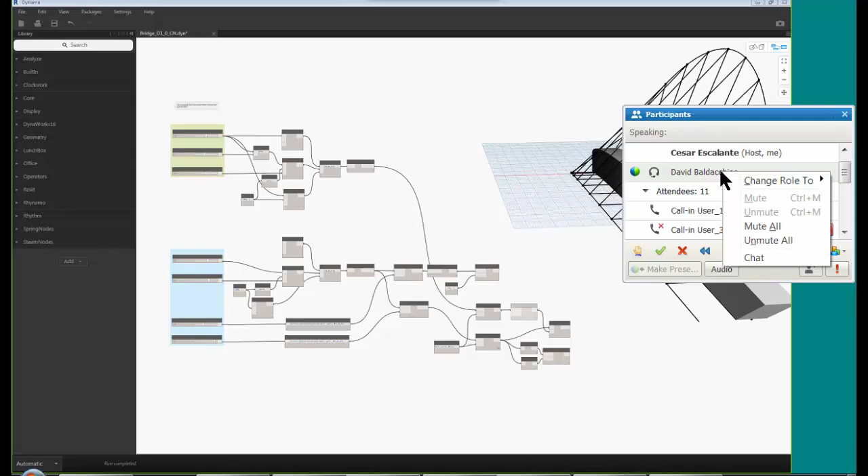David, I'm not sure we hear you. What is it? Hey, David, if you hear me, we don't have your audio. Can you hear me? Now we can. All right, I don't understand why this headset does this sometimes.

Sorry. So this segment will just go through a very short presentation on how to use the DoesIntersect node, and essentially takes an example that I had followed a while back from Zach Kron, and sort of builds collision detection, so to speak.

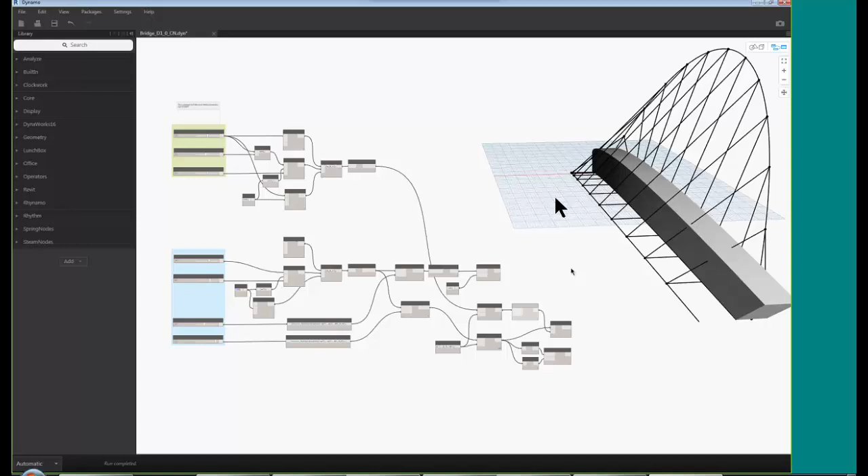So I actually took the nodes, and I'll expand them in just a second. I took the nodes and put them all into a custom node. So I'm going to go ahead and put that in here. We'll also go quickly through the process of putting this in a custom node. So I can pass the geometry, I can pass the...

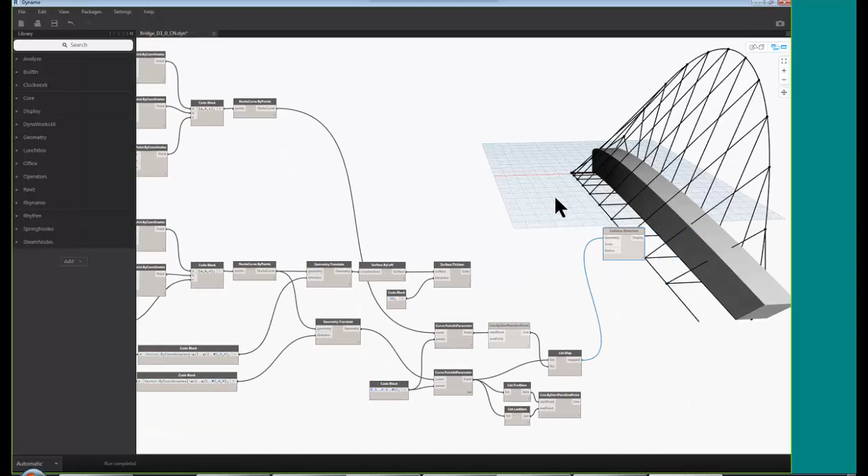Do you still hear me? Yeah, that was weird. Fault, sorry. Okay, that's okay.

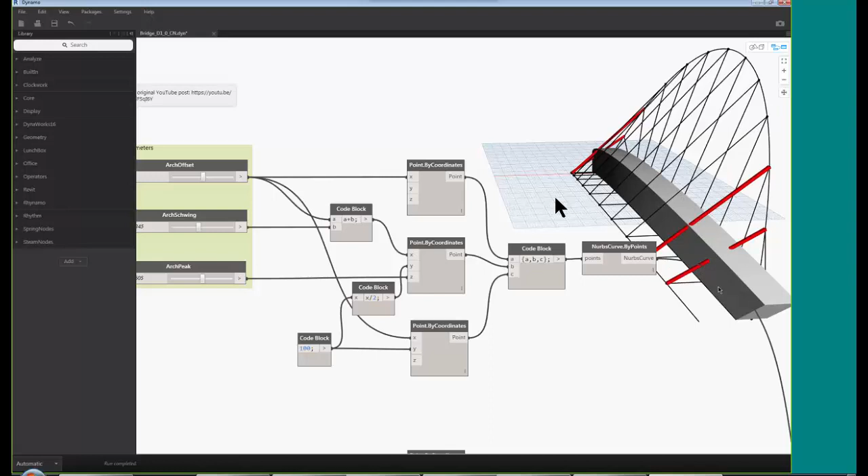Any time we change the geometry of this bridge—if you haven't followed this example by Zach, it was about an hour long if I recall, the YouTube video is up here—I basically followed him and built this bridge. During the presentation, Zach said it would be nice if you could do something more automated to find where your supports don't comply with certain clearance requirements. So that's what I ended up doing here.

As you can see, if I change the geometry of the bridge, you can see where those supports turn red, or they disappear. We're going to walk through the process of building this custom node, or set of nodes, that allows you to do this. I'm running version 1.0, and they actually fixed one of the problems I had come across in the past with refreshing, so that's very nice to see.

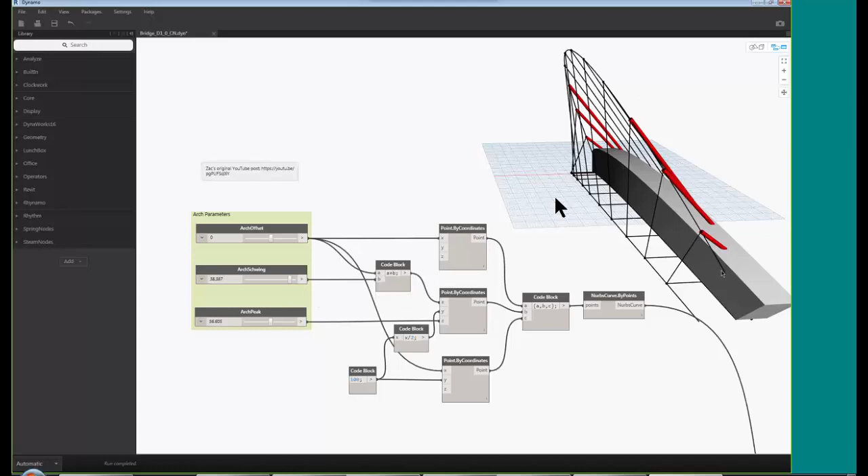We're going to just go through what this node actually does. So I'm going to go ahead and remove it, and I'll start by placing the geometry DoesIntersect node. This is central to what's going to happen here.

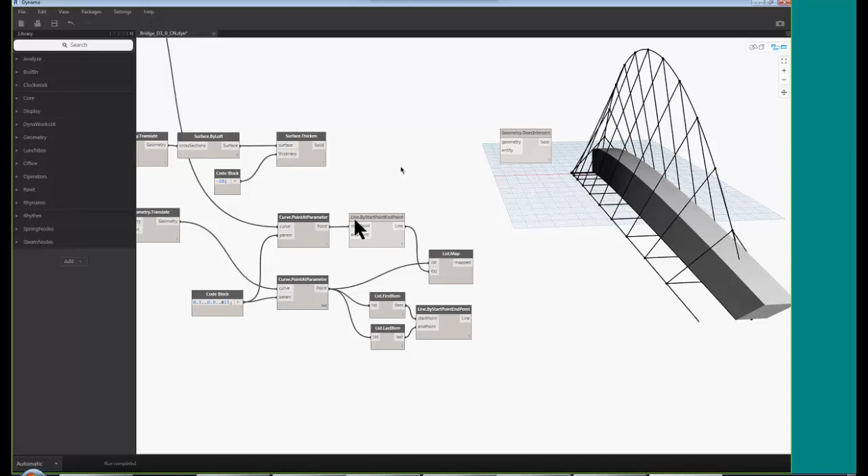I'm going to take all the elements that I want to test and collide them with this form right here. In this case, it's just a surface that's thickened by 10 feet. As you can see, if I change the value, the form gets thicker. So this is basically a clearance mass or solid, and it can also be turned off so it's less distracting.

So we pass the geometry here, and we're going to pass all the lines that we want to collide. In this case, I'm just doing the slanted supports—I'm not doing the curve, which we can do as well, but for simplicity I'll leave this as is right now. So I'm going to take these lines and pass the geometry, and then the entity that I'm going to collide is this solid that we just hid. I'll pass it to that, and I get a list of true or false.

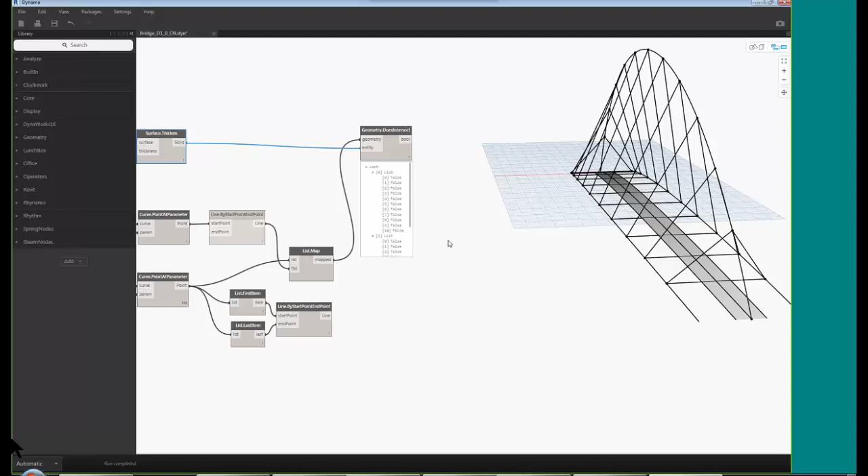So what I'm going to do is use these results. Obviously everything is false right now because nothing's colliding. If I change this—let's make it steep like this—you'll see that we have a few true values, which means that some of these are colliding.

And if we click on this node—actually not this node—we have to filter our list with the results of this list. So the next thing we're going to use is the filter by Boolean mask, which is one of the most popular nodes, at least that's how I find it to be very useful.

So I'm going to take the list and pass this as a mask. However, in this version, once you do this, later on we're going to have to flatten it, because I found there was a slight difference between version 0.9 and 1.0. So you always have to be careful and test out your definitions from version to version, because minor changes might cause a prior definition to fail.

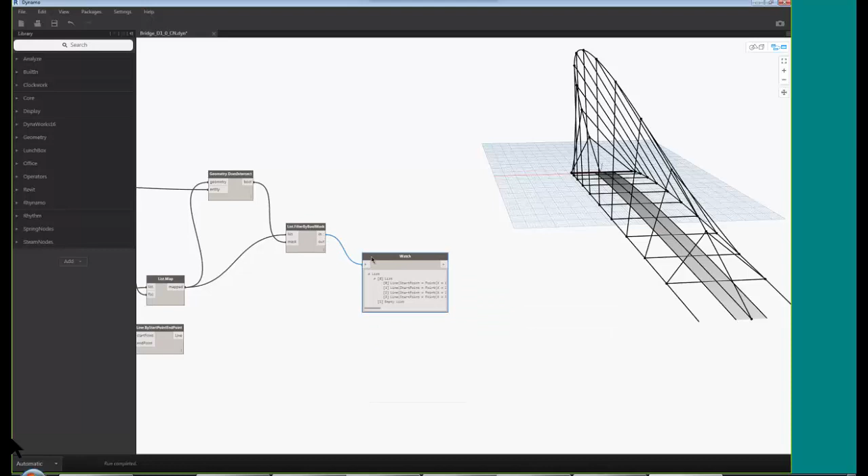So now we have a list of lines that's being filtered, right? If we inspect that using the watch node, we'll see it's outputting a list of 4 lines, and that list, if I click on each one, you'll notice the labels here—so you can actually inspect and see which lines are colliding. There's also an empty list in here.

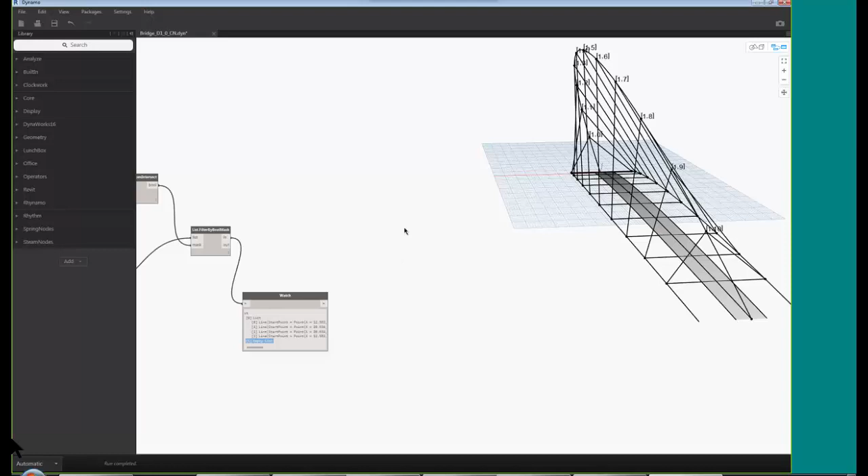So next, to highlight this, we could place a node to color these lines. The problem is you then have to go through this definition and start hiding lines, because the colored lines sometimes get encapsulated by other copies of these lines, and you won't be able to see the results. So instead, I decided to do a poly surface by sweep.

So I'm going to do poly surface by sweep, using a rail and a profile. For the rail, we're going to use this set of lines, and this is where I saw a difference between 0.9 and 1 — we need to also flatten this list. So instead of just getting a list nested inside another list with an empty list, we flatten this, and you'll see it's now just a list with 4 items in it. So we pass that as the rail.

Now we need a profile. For simplicity, I decided to use just a circle, so I'm going to use the circle by plane and a radius.

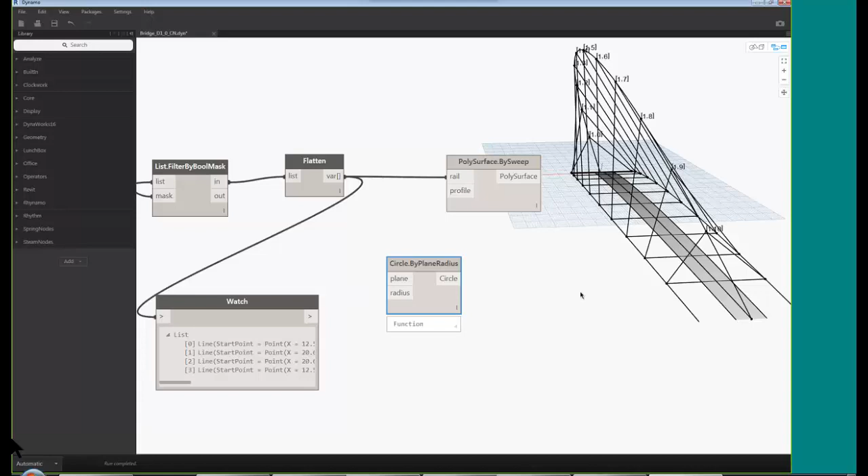Notice here that the radius also has a default. Nodes, as you might know, have an input with a default value. In this case, the value is 1, and since I'm working in feet, that means 1 foot. So I can even leave it out without giving it an input, and it's going to assume it's 1. I can pass that as my profile.

There's an error right now because I still have to remove this node here and define the plane. Since I have the lines here that are being filtered and passed through the flatten node, I need to just create a plane at the parameter. I find this node pretty easy to use - it's curve.plane at parameter.

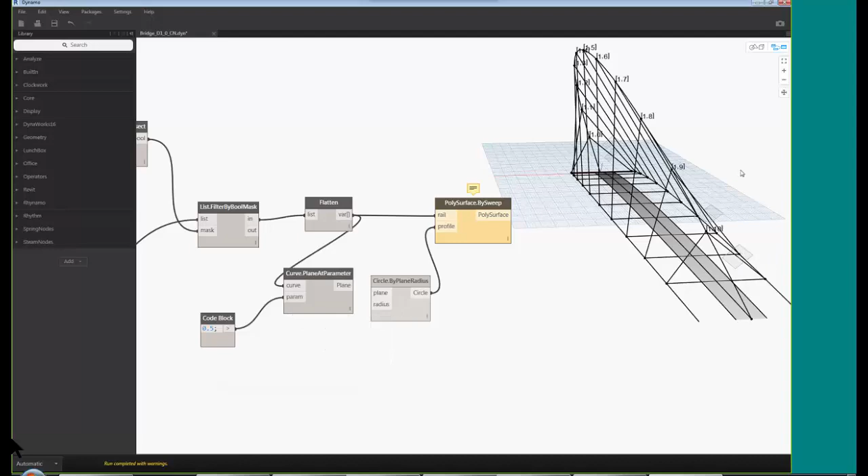It also has a default value of 0, so we don't actually need to do anything with it. I can take the series of lines, and notice over here we have some planes that appeared. Just so you can see what that means - if I give a 0.5 for the parameter, they go in the center of the line. I'll orbit a little bit so you can see them. Notice the planes right here on those lines.

I can also pass this as my plane, and there are the little circles I can use to sweep the poly surface. The other thing I found is that now this is failing because it doesn't know what to do with a list and a list. So if you adjust the lacing to longest, it understands that it needs to take the first item from this list, take the first item from this list, and create a poly surface, cycling through.

I'm not entirely sure why that is happening, because the lists are the same dimension - in this case there are 4 items and 4 items. So lacing set to shortest, if I understand it correctly, should still work, but it's not. I'm not exactly sure why - it has to be set to longest for it to work.

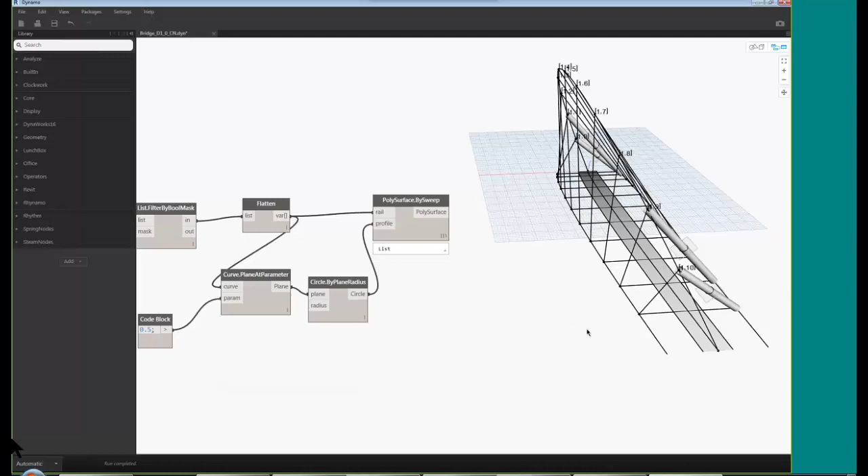So finally, to annotate this and make it a little more clear what's going on, let me readjust my screen here for a second. I decided to use the display by geometry color, so I'm taking the poly surface, passing it here, and then doing the color by RGB, ARGB.

Again, these have default values, as you can see. I decided to make it red, so I'm simply using a code block and putting the value 255. As you can see, it's colored red. Now, it's red here as well, but it's hidden because they're coplanar - the surfaces are coincident. So all you need to do is stop this from previewing, and then you can see this node essentially taking over.

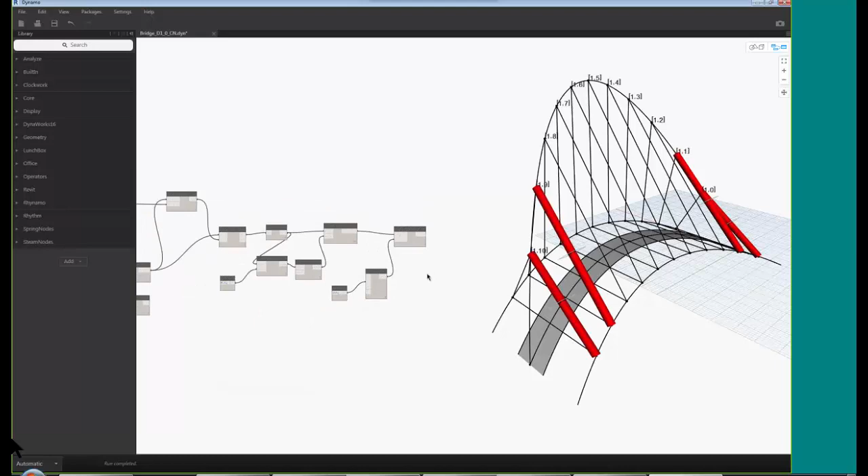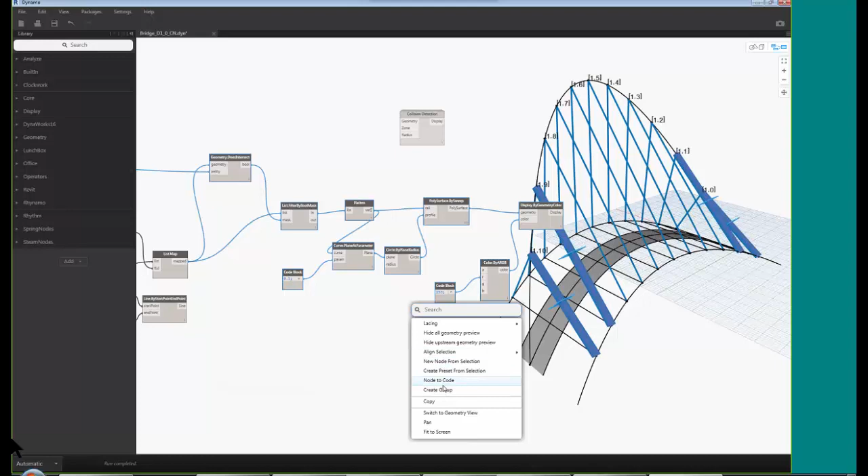That's pretty much it for what exists in this custom node collision that I'm calling collision detection. I simply took these nodes right here and said create custom node, new node from selection. It did a pretty good job at creating the node for me. I did make a few other changes to it, so if I go back to the node, I wanted to highlight a couple things that I did.

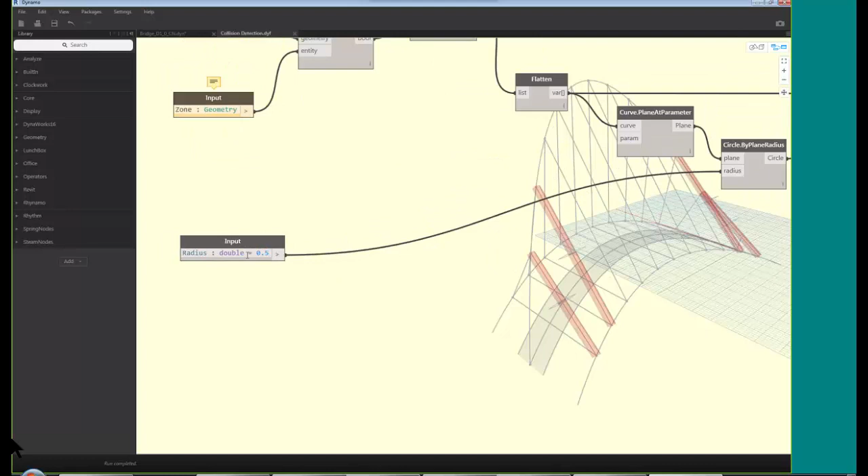I decided to add a default value for my radius - instead of leaving it 1, I wanted the default value to be 0.5. I was just experimenting and understanding how default values work in custom nodes. I renamed the nodes to whatever I wanted the labels to be, and there was another output I actually did not need and removed it - just a simple delete. I saved it, and you get the custom node so you can reuse it instead of having to do this whole thing every time.

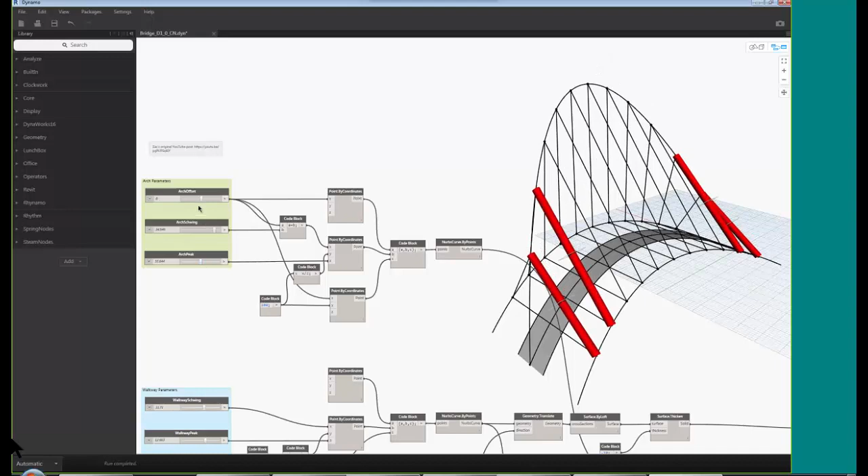The result is the same. The nice thing about it is that you can then play around with whatever you're trying to accomplish, whatever your structure is, and adjust and make sure that, for example, I can offset the arch here, and now I know that at this position I have the clearance I need for someone to pass over the bridge and not hit their head. There's a 10-foot clearance all the way across this pathway.

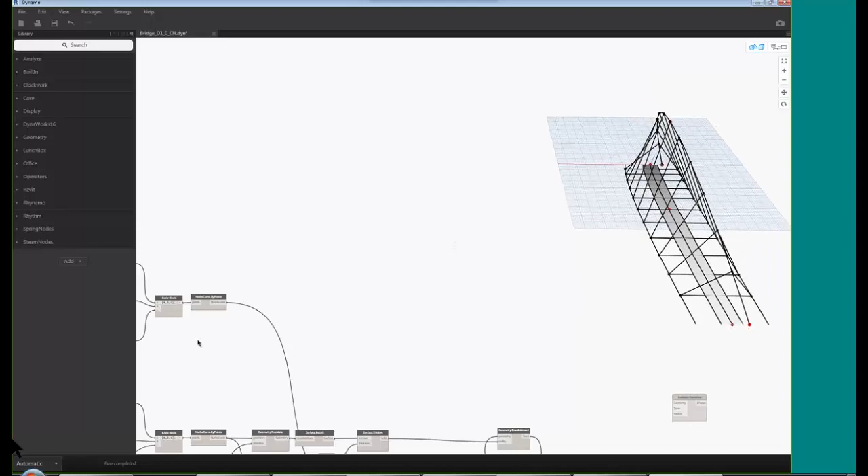So let's see - are there any questions so far?

The other thing I was going to mention is that, for example, right now I am only checking these slanted supports, whether they collide with that form or not. A couple things you can do is put more geometry in a list - so instead of just passing the list of lines, these lines right here, I can create a list, or take lists and join them and then flatten them.

And take, for example, this top support, take the individual slanted supports - as you can see, I get a list, so I have to flatten it again. Now I have a list of curves, and I pass that to the geometry. Oh sorry, I did something wrong here - let me see here.

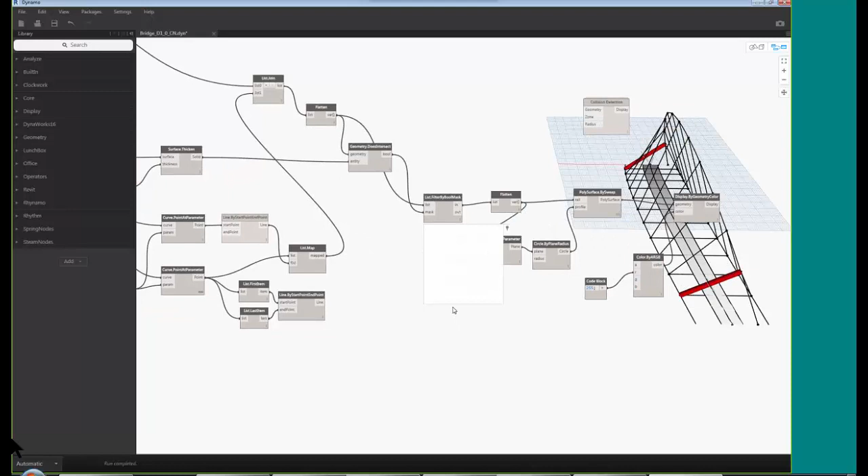There you go. So now it seems to be working as expected. Oh sorry, I'm going to close that out. Now it seems to be working as expected.

All right, I think that's it for the learning segment, unless there's a quick question I can help answer. Quick question, David: in this case, you extruded a circle as a way to visually indicate what's colliding.

Correct, yes. We could technically just change the color, right? And not extrude anything. Yes, you can change the color of the line. The problem is that when you have coplanar surfaces or lines on top of lines, you really don't have control over which line is going to be above and which one's going to be below.

So, for example, if I simply took this, as I was pursuing this, I was also curious to figure out a way to use the polysurface by sweep tool, for example. But that is what you're saying is correct.

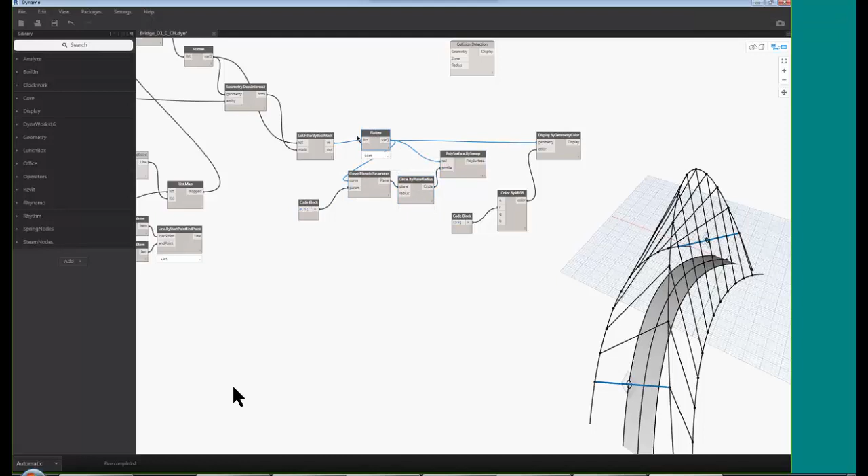What am I missing? I wonder if the color actually overrides lines and not just... I tried it, yeah, it does, because as I was playing around with that, let's see here, why isn't it?

Let me delete these. Weird, earlier I was able to change this to red as well. There you go. Somehow, I think there might be another copy of those lines. This kind of illustrates why I didn't want to use lines, because sometimes they sort of turn to black.

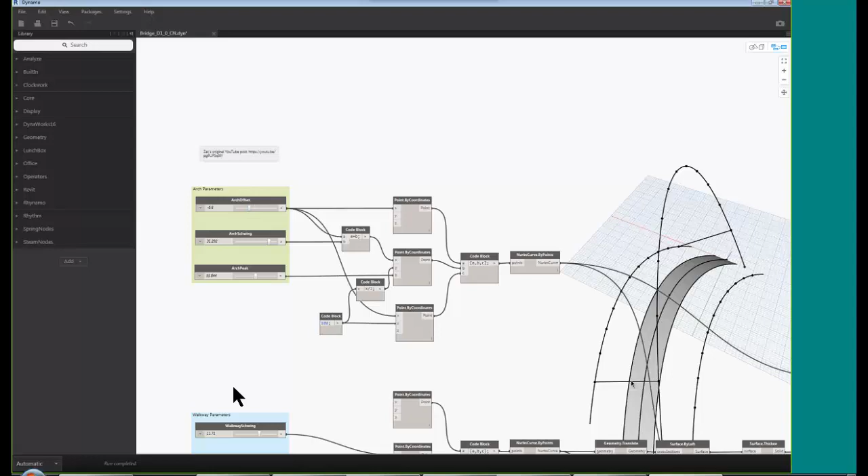See, it was still black. So you end up having to turn off a lot of preview geometry that I didn't want to do. So I thought that adding a sort of sacrificial surface that only shows up when there's a collision detected would be easier.

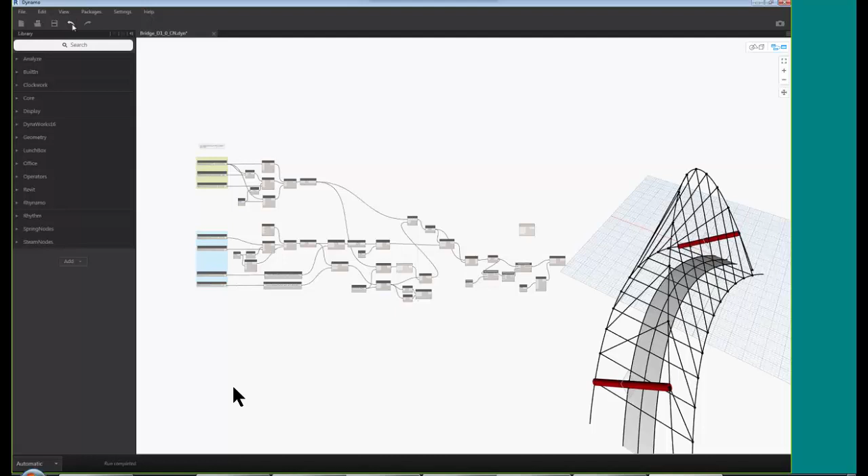So does that mean that there are multiple lines drawn on the same location at the end of the script? We just see all... sorry, what is the question? Does this mean that Dynamo draws multiple versions of the same line, one on top of the other, at the end of the script? And they just happen to be all black, so we can't see them.

The question was, if you pass the line into a new node that's using those lines, yes, it's going to be duplicated. Right now he was hiding some of the previews. That means that Dynamo draws those lines over and over for each node. I think that's what preview upstream does. Yeah, it replicates the geometry in every node.

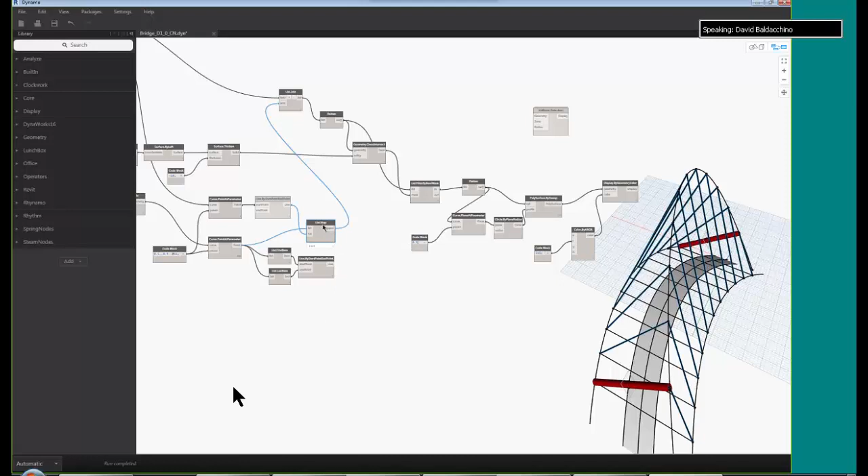This right here is utilized... yeah, seems not. Like for example, I've had a hard time also understanding how the preview upstream works, but my understanding is just like Cesar is saying: if you disable this, it means that anytime this list of lines is used, don't preview it anymore. So if you uncheck that, technically from here on out, that line only exists here, or if it's coming through somewhere else, I'm not sure. Let's see.

Well, it's still coming through, even though I said don't preview upstream here. This is what I was explaining - I have a hard time understanding what this preview upstream really does, because it feels like it doesn't work consistently. All right, we have a comment from Colin here. I was afraid to say that because I know he's online, but...

Preview upstream is only used with watch nodes. Wow, okay, so that means whether this is on or not, the geometry is still going to display. Okay, perfect. That explains why I wasn't understanding - my perception was that when you turn it off, you don't see it displayed anymore, but that's not how it behaves.

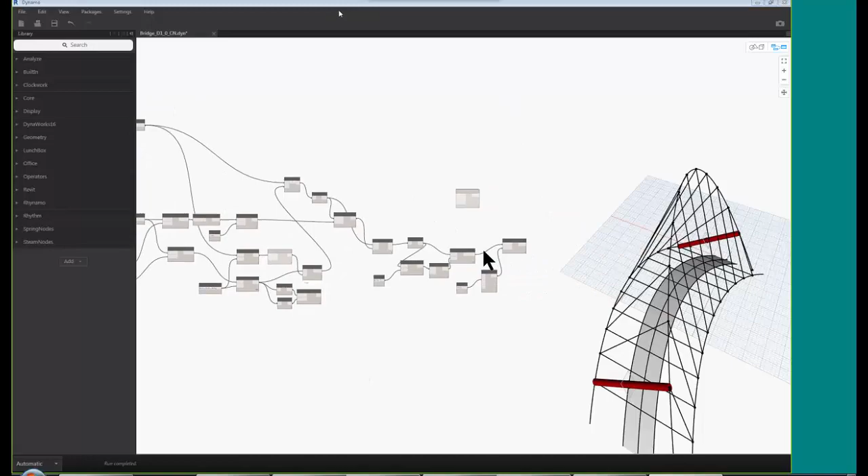Thanks, Colin. Any question for David? Good, David. So, if you don't mind, if people want to see this definition on our blog, could you email me the DYN file? Absolutely, yeah, that's fantastic, yes, I will. All right, thank you very much, David. You're welcome, thank you. And I will continue watching from home. Excellent, or recorded. Excellent, thank you.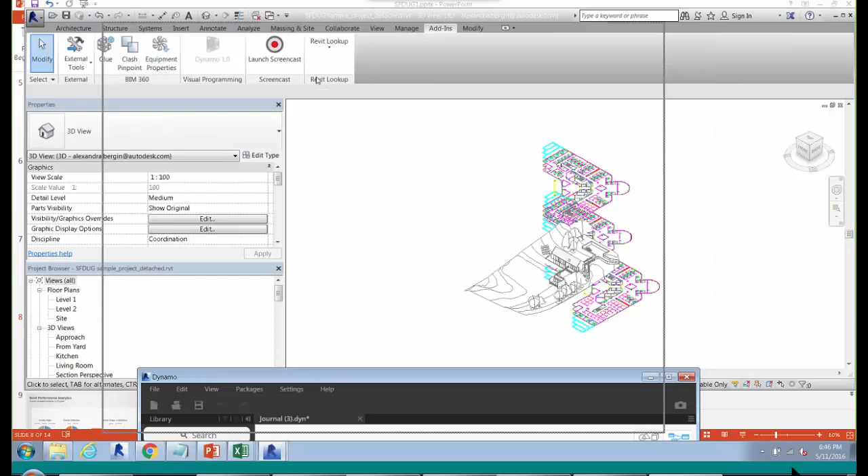Okay, let's make this big. Okay, so yeah, all of them are like this too. So we're gonna go slow and fast at the same time, just for digestibility, time, and my sanity.

First thing I'm going to do before we even dive in here, I want to show you what the output is, because that'll help you understand what the goal is.

And how I approach this, in working with Colin, is I came to Colin and said, I have these charts and this data and this source, and I know a little bit of Dynamo, and I've tried, and can you help me take it to that next level?

So I started with my end result, and I recommend if you are looking for specific information to extract out of your files, really start thinking about how you want it in Excel, because there's a whole part of developing these Dynamo graphs which is sorting the information to output to Excel. So you really want to understand what you need and how you're going to format it before you jump in here and spend a lot of time.

Okay, so what I've got here is two different tabs. One is called Journal Stats and one is called Add-ins. All right, so all we're doing is we're reading a journal file, right? And that is this guy here.

And this is like the extent of a journal file. And this is a short journal file, this isn't even like a long journal. This is like open the file, draw a line, and close the file. Now we know how to use Revit. Yeah, it's a lot. They can get really, really long.

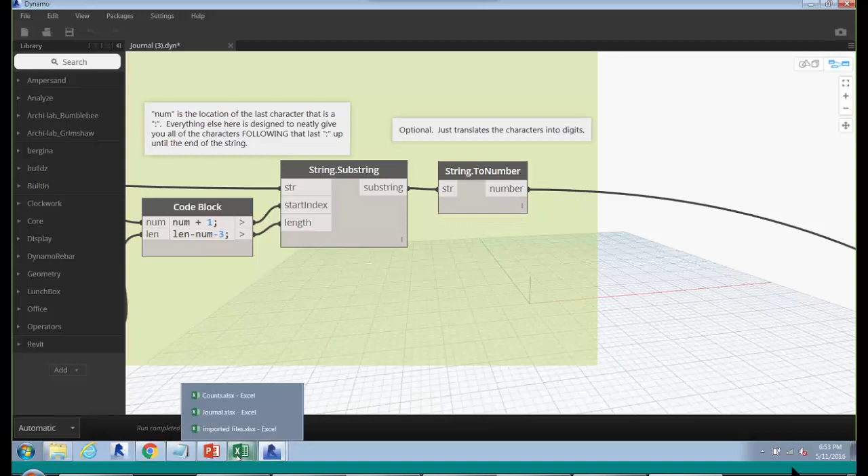If you look here, the first one—you see how this is represented all the way to the far right, and nothing else is. None of these are really considered numbers, but this one is. So Excel's treating this differently; it's a different data type than the other ones. This is the stuff that can really screw you up, because you're like, why aren't things melding right, or why aren't things calculating properly? And it can be just little stuff like that.

So this one is the exact same as above, literally the same theory, and as far as file size. One thing that's nice when you start parsing these journal files is once you've got your baseline graph, you can start copying, and then when things aren't working, that's when you have to start trying new things.

The video card and driver, for example, what do we do here? A couple different things had to happen, because if you look at the string, it's one string, but it has the card and the driver information, so we actually had to split it up. Whereas the other one we just took the one piece, found the little part of information we wanted, and pushed it out. In this one, we needed two pieces of information.

So you split it, and then we did a lot of trimming of white space to make sure everything was formatted right, and we were able to calculate those. How we're measuring is we've been calculating the number from the colons of values, so we want to make sure we don't have any empty spaces in there that we're misidentifying information.

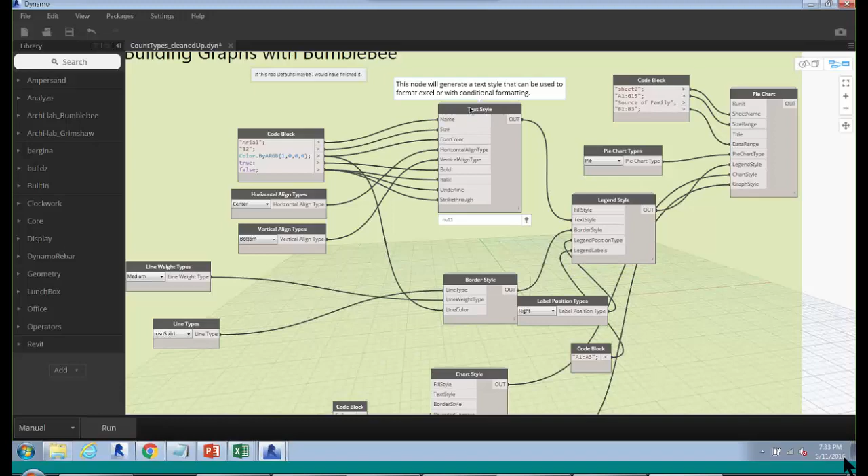The only other thing I have on here, which was a total side project that didn't end up happening, is I wanted to try to build all of the graphs using Bumblebee. I don't know if you guys are familiar with that. The issue is that this is to build a pie chart, this pie chart here. The problem is that there are no default values for any of the nodes in Bumblebee, so you have to laboriously code block out every single value. I just lost patience, honestly.

I was like, I just want to press the pie chart button in Excel, and I'm just going to do that. So you can kind of decide if you want to. I left it here just because if you were going to use this in a robust way in your firm, it might be worth your time to invest in building these things. For me, to show you guys, I did this for a little bit and was like, no more Bumblebee, no more. It's a package that enables you to build graphs with Excel.

Have you guys used it? Did you guys run into the same issue where just the default values killed you? Yeah, I have to spend more time undoing things than doing things. I think there's value there, but at the same time, it's just a lot of setup. Easier just to pass it back in with Flux and Grasshopper and use the plugins that are there. If you want to do that, you can just do it in Grasshopper. Yeah, no, it's true, it's a lot easier.

So that's content in a nutshell. Just to look at the final result again, we have this master count, and then we can break that up into different categories. If I had had more time in preparing for this, I would have done more. I have these other things that I just sort of quickly extracted from the master count list, but didn't have time to do the breakouts within the Dynamo graph.

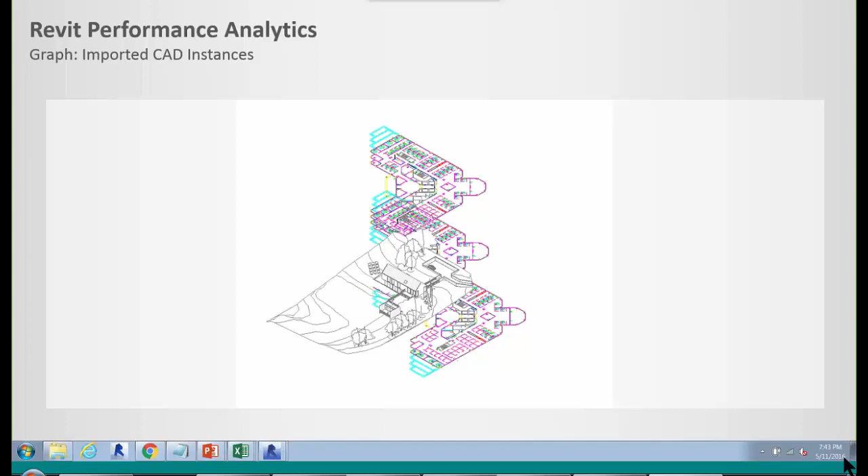So I'm just going to go ahead and open it. Okay, so like I said, look at a totally digestible and non-intimidating graph. Maybe I should have started with this one, huh?

So basically, like all the other ones, I'll show you the output first. There's a lot more I could do with this, but I ran out of time to show it all. All I wanted was to know the file name of every imported instance of a file. In this sample project, I've got 3 files here - 2 of them are imported and 1 is linked CAD.

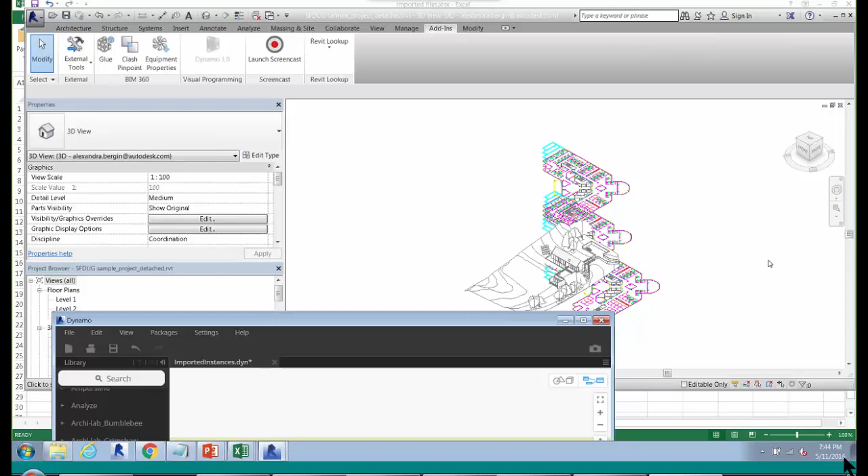So there's a difference, and there's 2 different file names. Even though it's the same file - because I'm lazy and didn't want to find 2 different CAD files, I just changed the name - what you're seeing here is floor plan sample and floor plan sample copy. Those are 2 different file names of imported CAD content.

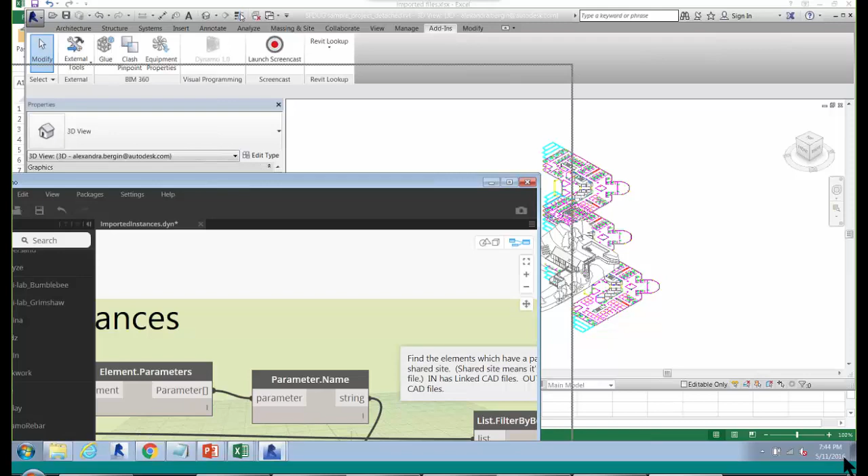So in Dynamo, the first thing you've got to do is find the type of element you're looking for in your project - that is the imported instance type.

Now the next thing you have to do is actually figure out which of those are imported and which are linked, because with CAD, Revit calls linked CAD an imported instance too. That's kind of annoying and confusing.

What you've got to do is there's actually a trick: linked files have a parameter called shared site, whereas imported ones do not have that parameter. That's super helpful because then you can sort the parameters of the type so that you only get the ones that contain shared site.

So then what we did here, the filter by Boolean mask, is we just took the ones that had the shared site parameter. This 'in' is the linked file. So like I said, you could do a lot more with that Excel document I had earlier.

Right now you're just seeing imported instance - we're going to get the name in the next step. But like that Excel file, it can tell you not only how many imported CAD you have, but also how many linked CAD you have. You can see, oh look, this team imported the CAD 200 times and then linked it 6 times - someone knows what they're doing. It's interesting to look at that and use it to target training and educational efforts at the project scale.

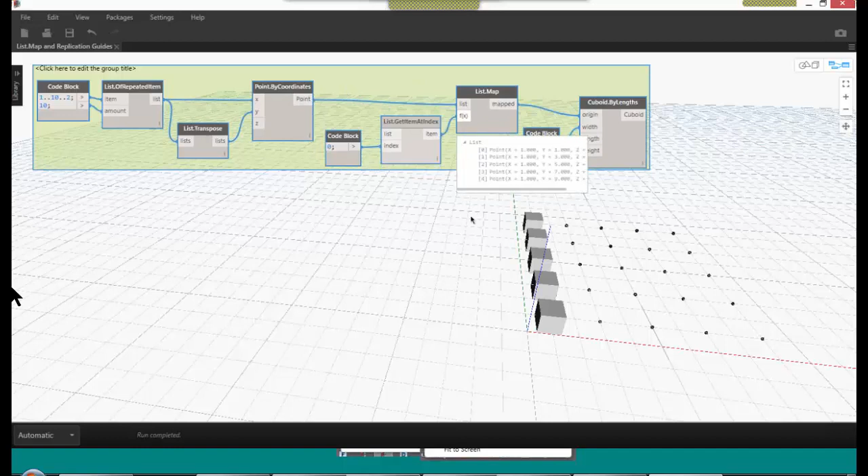The other way it was being used is with endpoint - actually, we saw it in the first presentation, where he was using one start point with multiple endpoints. So his input was the start point, and then he had a list of endpoints that he needed to go to. That's where you'll start to see list map being used, when you need to operate on a single item with multiple items.

Generally, with the new way Dynamo is working, if the data structures are exact, as long as they're two-dimensional, it will kind of figure it out. And the way you can tell is by the inputs. If you go back a couple of meetings, you'll see the talk that Colin gave on this - that's a very good hint to whether this will work with a list map or without. Generally, if you see something like a single point, for the most part, you can get away without using list map.

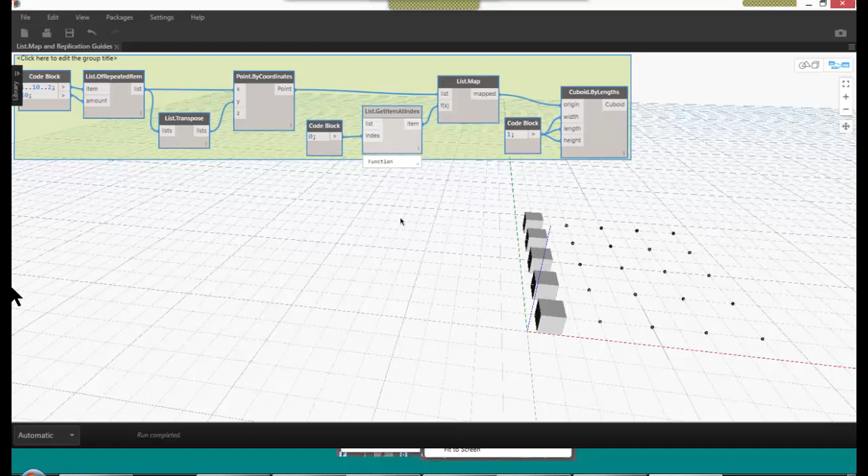It's once you start to see the ability to take in something more than just a single item that you may have to start using a list map. But that works great if you've just got two-dimensional lists. Once you start to get three-dimensional, four-dimensional, five-dimensional lists - which when working with geometry and multiple data sets at the same time is very easy - I find myself getting at least 4 or 5 data levels most of the time when I'm working.

And so I was having to stack list maps, like 3 list maps for every single command I was using after a point, and it just became really redundant, really heavy. It was like, okay, I can either go back to traditional coding, which I don't want to do, or I need to figure out another way. So I started exploring some things with Dimitar, and he started using these brackets, and I was like, okay, what is this? Because he was able to do things in one line of code that took me about 6 or 7 nodes to do.

And I found out later that they're called replication guides, and it essentially prevents you from needing to use list map a lot of the time. So what we just did in almost 8 nodes here, we can do in essentially 1 code block.

What's really nice about this is by putting in these brackets, you're basically matching lists. You're saying that these lists are equal when the numbers are equal. When you do things like, say, they're not equal, so when I have a 1 and a 2 here, I'm saying that every list going into this first one gets matched with everything going into this.

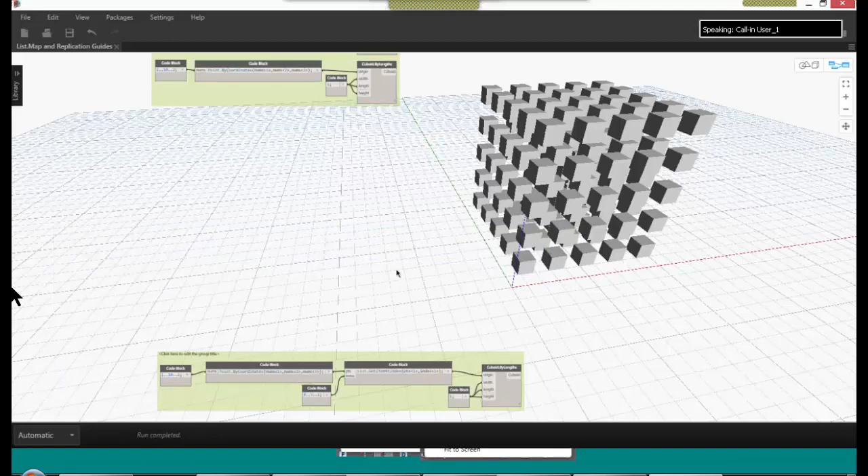You can actually go a little bit farther with it once you get to this level, into things that would take you a lot longer to do. You can start to operate on getting specific items using ranges out of larger data sets. So I had lists within lists within lists, which would have taken at least two list maps to do. You can then operate on these nested lists in pretty much the same fashion using replication guides.

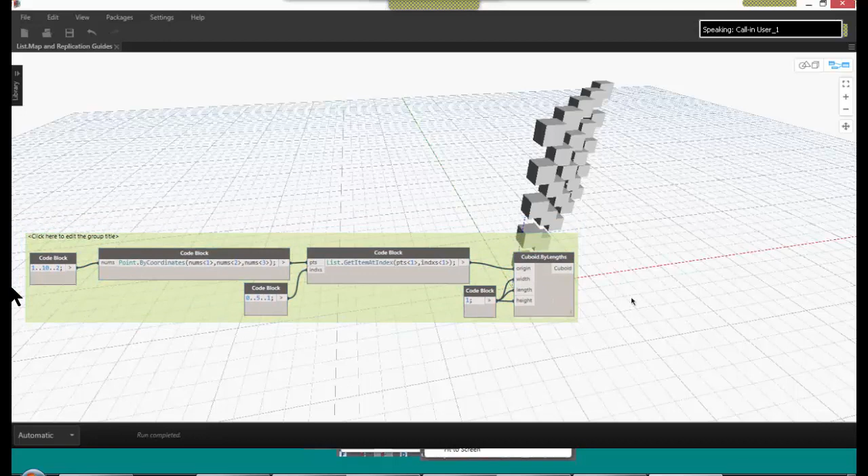So that's pretty much it. It actually got a lot easier recently. Any questions? Is there any node for replication guides? Nope, it's just design script. Some of the new nodes have started incorporating the replication guides, which is why it's starting to get easier. The hints for that are there when you hover over an input.

Yeah, it's pretty cool. So we can take one of the example graphs where we had two list.maps, and you could start to plug in the 1 and the 2 like this. And then you'd eliminate a couple of nodes.

This is how you can start building patterns too, right? Because you could have three lists and start picking elements from one of each of this list. You could do that straight out of the box without code blocks, but you'd end up with quite a few nodes getting patched together.

And then the danger with that is after you get to that point, literally every time you try to run something after that, unless you're flattening and destroying that structure, you're having to reuse pretty much that same number of list maps. If you do that at the beginning, that's a lot of extra nodes. So it's more about what happens downstream after you start creating that data structure.

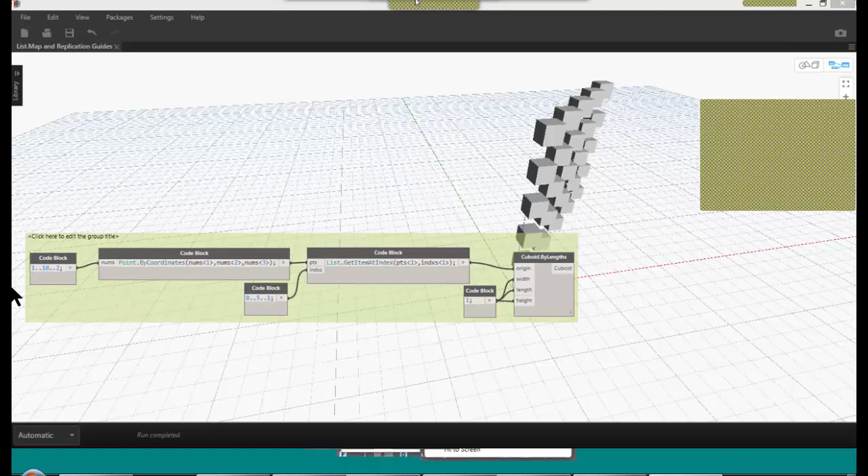I was half waiting for the question, what happens when I have multiple lists? Well, that's when those replication guides really start to help, because you don't then have to use combine. There's situations when combine list doesn't work.